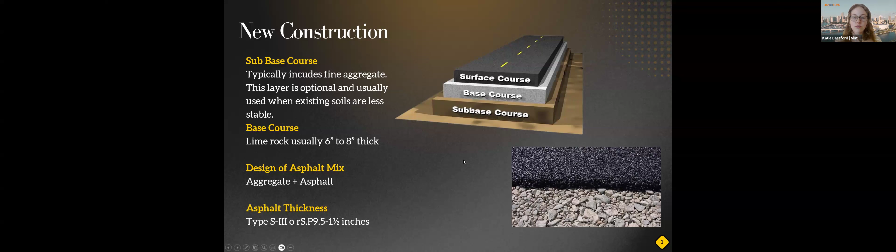Perfect. We have a few other questions, but those are more about repairs. So I think we'll wait until we get to that; they'll probably be answered later on. Perfect.

Typical life cycle of asphalt. Let's talk about this. Why do I say typical? Because there is no typical condition for a parking lot. Think about this. We as human beings have a typical life cycle, right? The more we take care of ourselves, the longer we should typically live. So asphalt is never typical. You have different parking lots made of different asphalt mixes from different asphalt plants with different contractors in different locations.

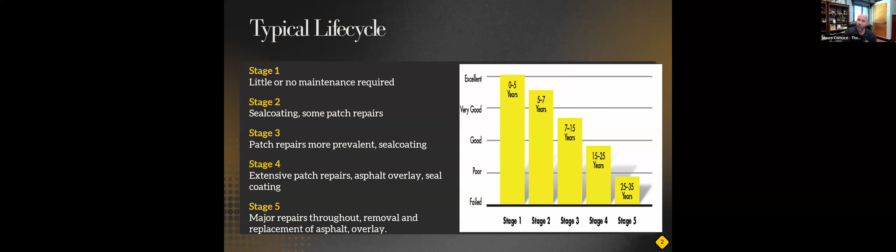The reason with parking lots a little bit less is because drainage on parking lots usually works not as well. And two, the loads on parking lots are always static loads. There's always cars sitting on it, and there's more traffic in parking lots. Okay? So what do you want to take away from this? The longer you wait, the more it's going to cost you. And if you do maintenance early on, your dollar will go further later on.

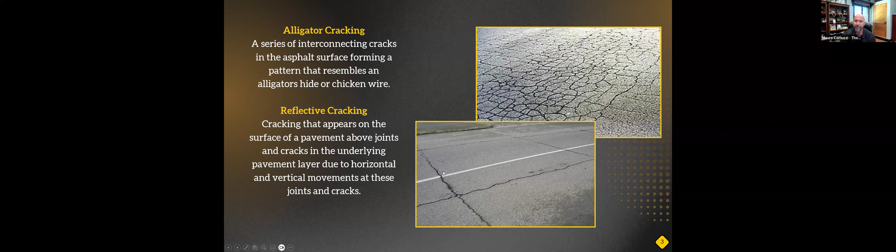Potholes. Potholes are probably one of the things that people are the most familiar with in asphalt. Not because you see them, but usually you feel them. You know, you're driving into a hole, and they're a very big liability. They cause liability to vehicles, pedestrians, to anything that goes into them, right?

So here in South Florida, where we are, we're attacked from the surface and from below the surface. And what do I mean by that? Well, we have water 6 feet below the surface, some places 3 feet below the surface, constantly moving. And what that causes is sometimes that subbase that we talked about in the first slide to shift and fall. And when that happens, you get a small sinkhole.

Up north, and when I mean up north, in the Orlando area, outside of there, Zephyrhills, Land O'Lakes, you can go to sleep and you have a neighbor, and the next day the neighbor's house is gone. It's because of the sinkhole. Kind of the same situation, but on a smaller scale here.

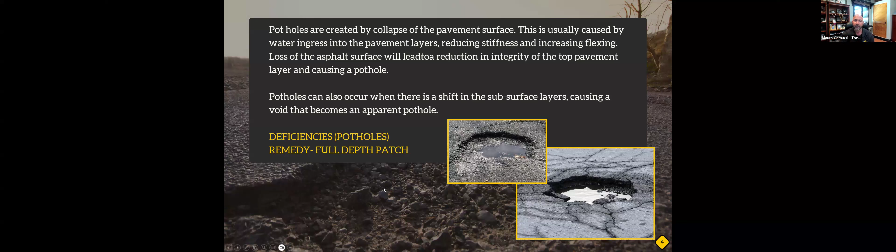Root damage. So somebody just asked a question about root damage. Here in South Florida, or anywhere in the country, we have ficus, we have palms, we have oaks, we have black olives, anything else with a root. This is prevalent. Unfortunately, the way municipalities down here require shade trees to be put into islands and different places, you're going to deal with this. And it's also a very big liability. I don't believe that there's a way to eliminate it completely, but you can minimize it by doing different things, and I'm going to talk about that in a second.

And once you take care of this, it's probably going to happen again. A tree will never stop growing. A root will always try to find water somewhere. So it's very important to continuously prune your roots and have your landscaping company outside the asphalt do as much pruning as possible, making sure that they're keeping them at bay.

But in the asphalt, when we would fix this, we come in, we isolate the area, we go as far as the root damage is, you cut out all the asphalt, remove it, cut the roots at the asphalt edge, remove them, put back new base and new asphalt, and patch it with a full depth patch.

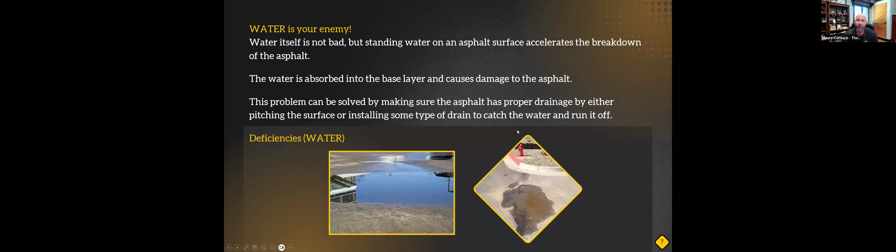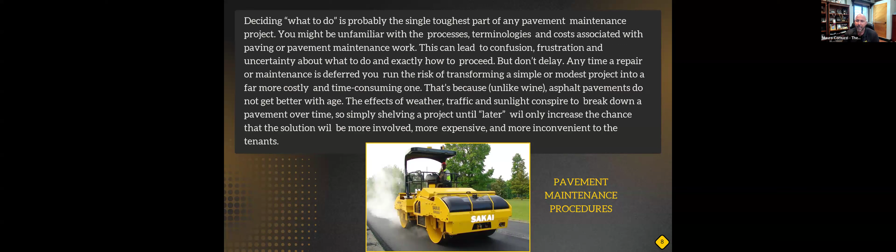So I do feel for you, especially your property managers and board presidents and board members. You're trying to be as responsible for your HOA. And I know that that's difficult, but find somebody that will tell you what you need to hear. Find somebody that's going to teach you about the issues that you're having. That's very important for you guys.

Let's talk about some of the things that we just said. What should you do and when should you do it? Asphalt overlaying is putting asphalt on top of asphalt. So you have asphalt that's in good condition still, and you put asphalt on top of that. That's called an overlay. Okay. You're not touching the asphalt that's there. You're not removing the asphalt that's there. You're just putting asphalt on top of asphalt. When is that acceptable to do?

Okay. So we learned that you have reflective cracking, right? So if the original asphalt is very cracked up, you want to do something to it before you put asphalt on top of it. So asphalt that's not that bad, call it 50, 60% is in really good condition, and you've got some cracks here and there that are not that bad. You don't have any alligatoring, you don't have any huge potholes, anything like that, you can overlay. Right? So the asphalt has to be in pretty good condition.

And where do you typically see that? Roadways. Roadways are typically ones where the asphalt's in good condition after 15 years. If you overlay it, put another asphalt course on top of it, you can add another 30 years to that. You still have the 10 years that was left on the original. Now you're going to have more asphalt on top, giving you a thicker asphalt layer that's going to give you a better structural number.

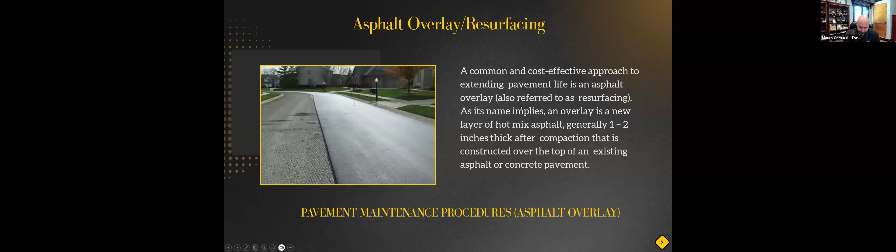Asphalt milling. So remember we were talking about the reflective cracking? One of the ways to minimize that is to mill the surface first. So let me break it down in another way. Everybody here has had a wood deck or something like that that's very rough. Before you finish it, what do you have to do? Sand the wood deck, get rid of all that damage, get rid of all that rough surface, and then you would finish it. Well, milling is kind of the same way.

So asphalt this thick, let's say we want to take out 2 inches because the top is bad. It takes off the 2 inches, and then you put asphalt on top of that. Here in South Florida, we typically mill an inch and put back an inch for most of the HOAs or parking lots that we do. But if you have a lot more asphalt, you can take off more, right?

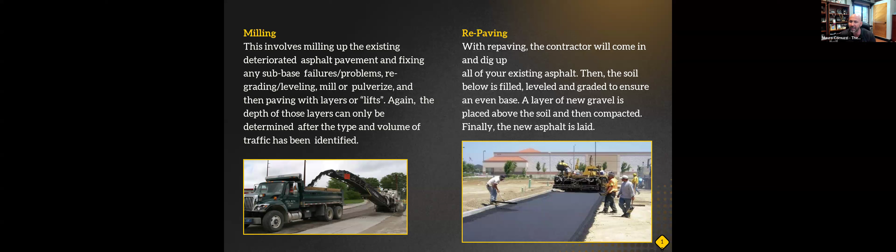This is typically the most common thing you're going to see in your asphalt maintenance life. It's patching. Almost every asphalt parking lot's been patched with something, because there's always an issue at some point in the lifespan of that asphalt. Let me talk about a few things about patching, right?

There's 3 different types of patches. We don't use all 3, but they're typically seen in the market, and I'm going to talk a little bit about those. You got cold patch, you got skin patches, and you got full depth patching. I've talked a lot about the full depth in my presentation so far, but I want to talk about the other 2. Cold patch.

Cold patch, if you don't know what that is, is an asphalt material you can go right now to Lowe's or Home Depot and buy a bag of. 20 years ago, the technology wasn't so good. Today, it's not bad. But what is it good for? It's good for temporary repairs, to reduce a liability and to not let that pothole or damaged area get any worse. You can use it in potholes and some damaged areas.

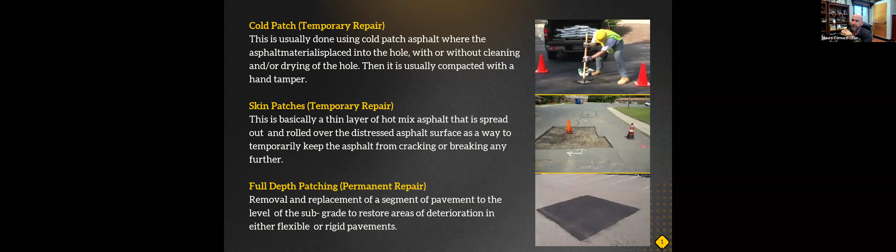And then seal coating. We're pretty much at the last here, and hopefully I can answer the questions that I had about seal coating. I get asked a lot if I believe in seal coating, and I think somebody asked, why don't people seal coat? Well, people ask me if I believe in seal coating. Now, wholeheartedly, I say yes, only if it's done at the right time. And I'm going to repeat that. Only if it's done at the right time.

Now, let me give you an example. If we decided right now, Katie and everybody on the panel, to go to the beach today and it's very sunny. We get to the beach at 8 o'clock in the morning. We start having a discussion. We cook something. We're having some drinks. At 2 o'clock, we start to see our skin, and we're starting to see that we're sunburned. And now we decide to put sunblock on at 2 o'clock. The damage is done. It's too late.

Same thing with asphalt. Remember, asphalt wears from the top down. The bottom doesn't get damaged from the sun, but the top does. One of the worst enemies of asphalt is UV rays. That's why you see asphalt turn that gray color, because it gets oxidized by the sun. And when it gets oxidized, it makes the polymer, the black asphalt binder that's holding everything together, brittle. And when it's brittle, it starts to lose its thickness from the top down.